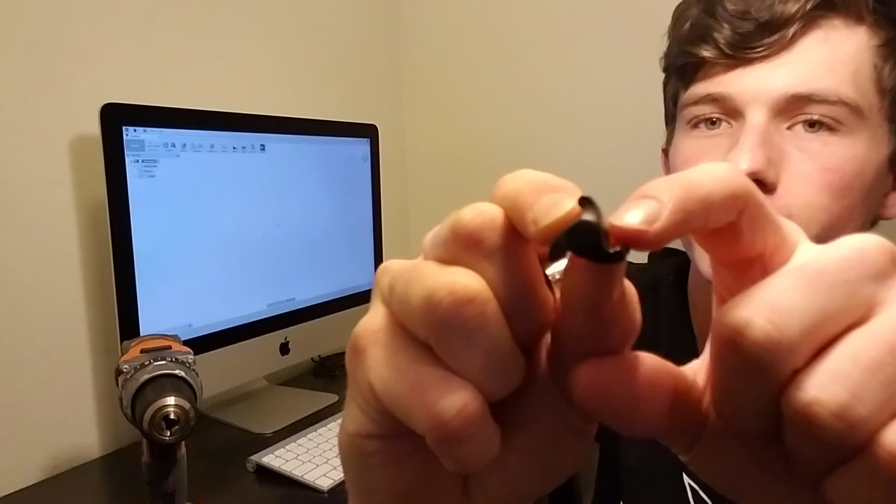But a regular socket isn't going to be a perfect fit for it. So right now my design is to 3D print a custom socket piece that will install on the drill and fit in here perfectly, because there are 3 different sides—1, 2, and 3—and you can see it curves out right there. So what I want is a nice perfect little circle that's going to fit in there. Let's get started—that'll be pretty neat. The maintenance guy Jim's going to be pretty excited about it, at least I hope so, because I didn't tell him.

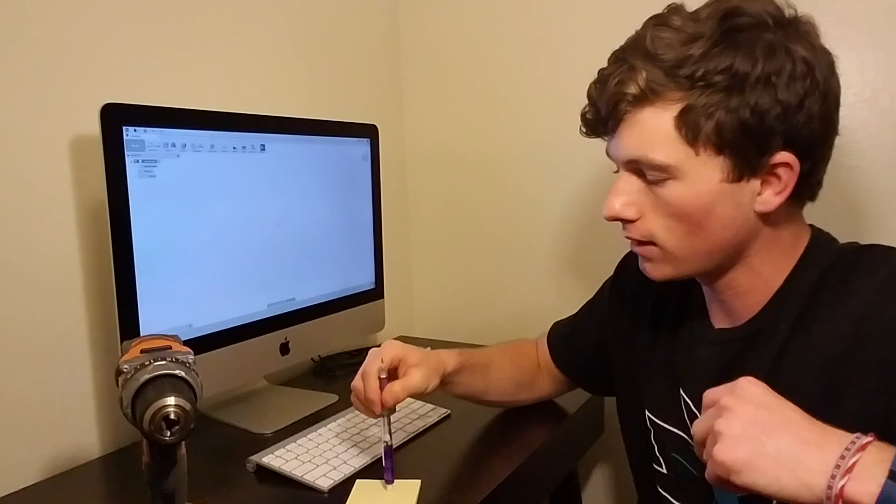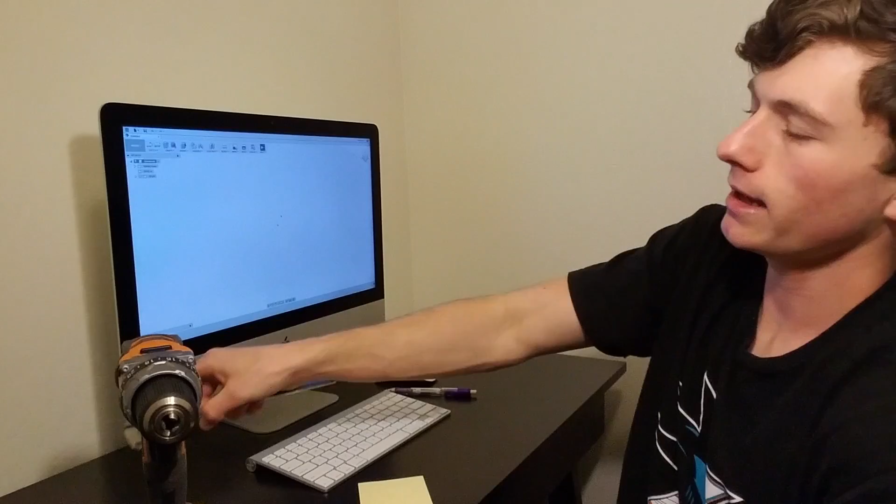Before I go on my computer, I always draw on a piece of paper to get a 2-dimensional feel of it and some dimensions. The first thing I want to measure is the circumference or diameter. It doesn't need to be super accurate, but pretty accurate. So I'm going to place it in here—doing this, I'm not going to get the circumference because it's a triangle.

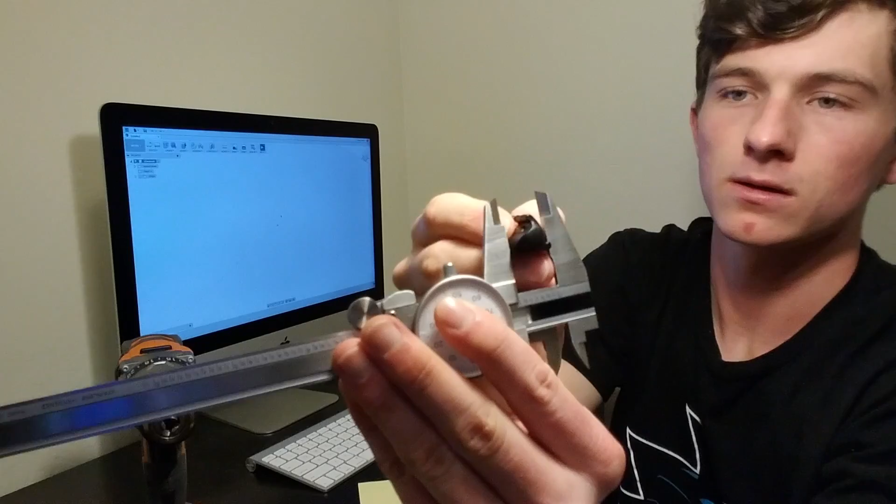So what I'm going to do is twist it in there. It doesn't need to be 100% exact, but I want it nice and loose so it fits in there. For the diameter, I'm getting 0.692 inches—sorry if you like the metric system, this is in inches, you just have to deal with that.

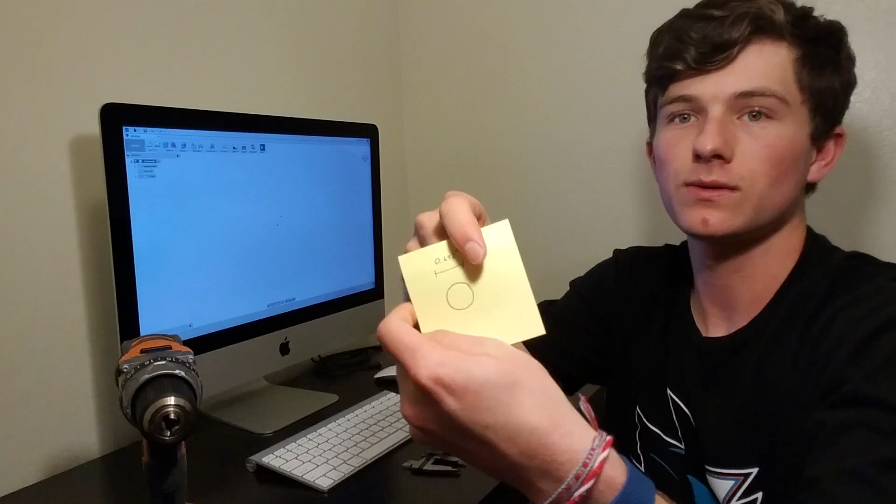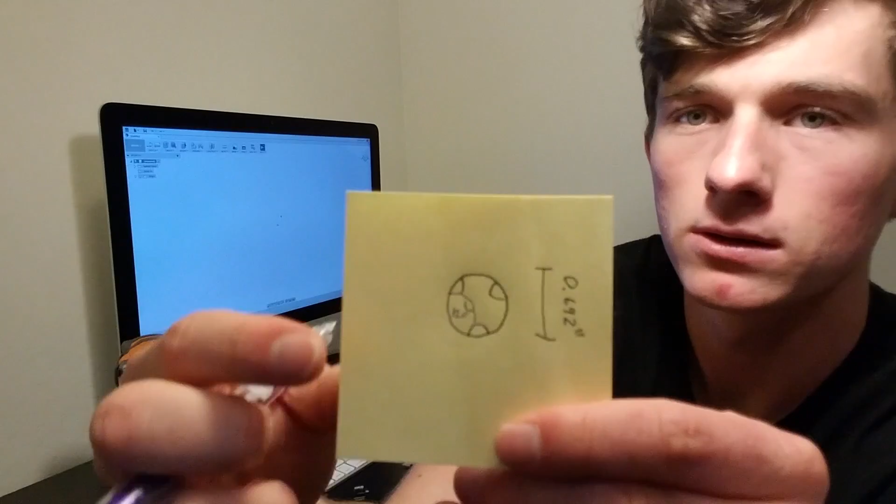Next, when I have my sphere or cylinder set in there, I need it to be locked in, so when I twist the drill and move it over, it locks in there and starts tightening down. So I'm going to install 3 tiny little cylinders that will notch into there, kind of like this, spaced 120 degrees apart—1, 2, and 3—showing it's 120 degrees apart. There's your diameter for you.

So this is where you're going to install it, slide it in there, and then I want something like this shaft on the back of it so it can install onto the drill. And since this is 3D printed, I think I want this a little bit thicker—so let's just measure this. 0.35.

So it's going to be a little bit easier to grab on there. And that side right there is 1, 2, 3, 4, 5, 6. So it's a hexagonal polygon, 0.35 inches.

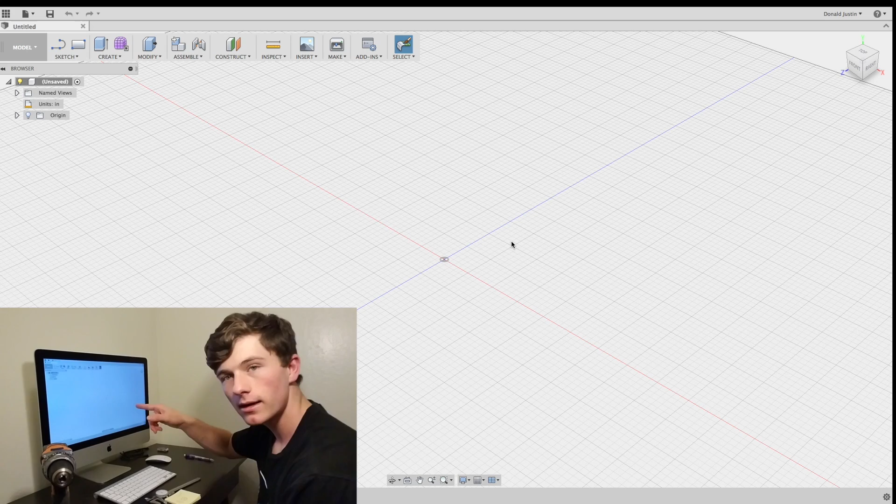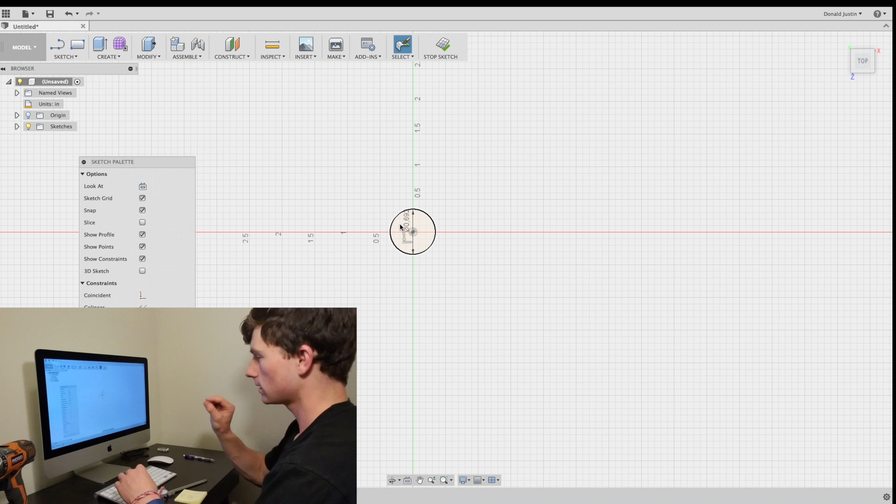Alright, let's get started. We're just going to start the sketch on one of these planes, beginning with a circle with the center point, starting in the center right here. We want that diameter to be, we already measured it out on our piece of paper, 0.692 inches. And then that's the smallest part where the inside wall is going to touch.

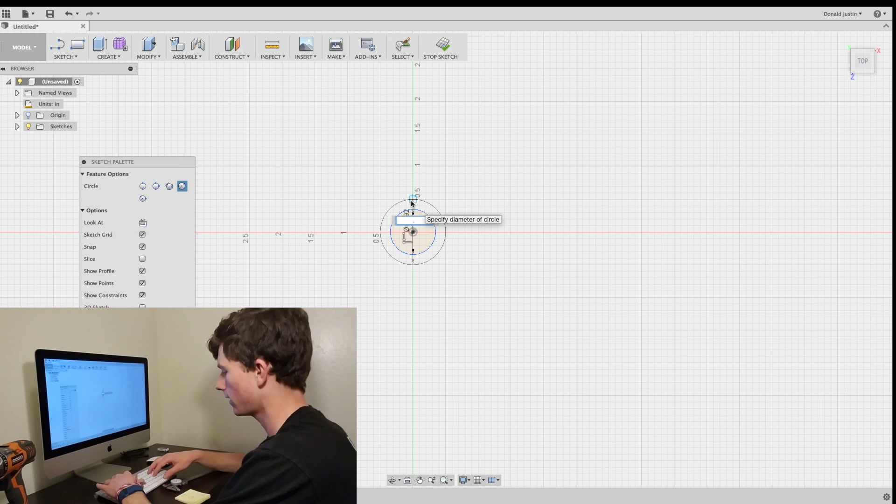But we want to build an outside wall, so I want to make the outside wall sort of thick. Remember, this is going to be 3D printed, so the wall thickness should be 0.1, looks good. So add 0.1, so 0.85. And then there's our wall thickness right there.

And then we're going to go over and just make one little circle on the edge right here. We're just going to make this an arbitrary height. At the maximum, it looks like we want it to be about 0.2. So let's dimension that. It's 0.236, so let's make it 0.19 just to be safe.

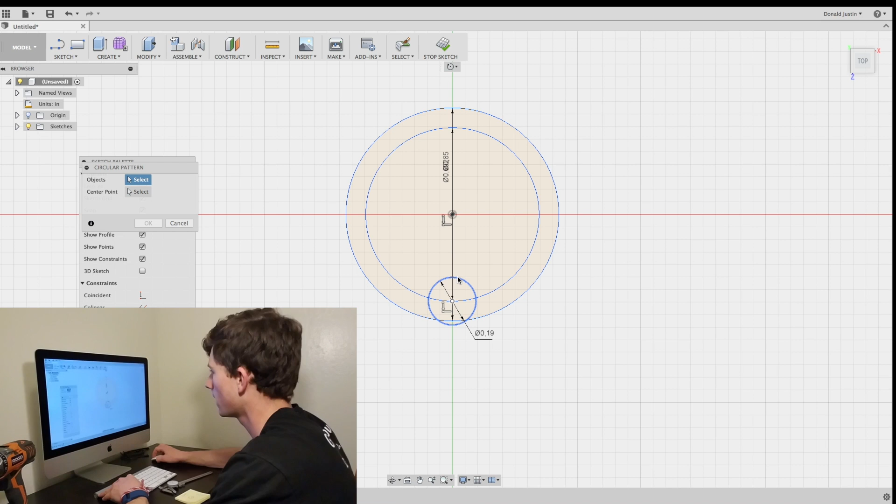And then they have this really cool thing. You go over to sketch, and you don't have to do any math. You click what you want, then click the center point for it, and you can change how many circles you want. But we only want 3 because that's exactly how our shape is here. So we're going to make it 3, click OK.

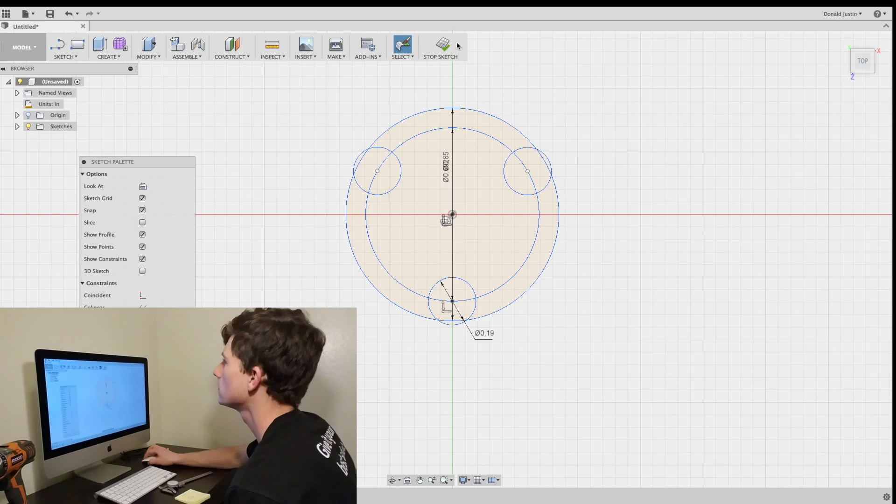And we are set. So let's stop this sketch and do an extrusion right here. Let's see what this piece kind of looks like.

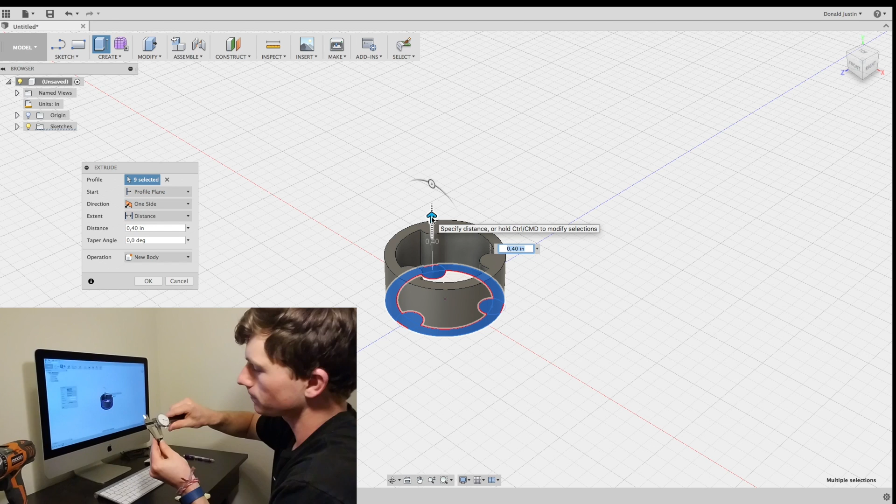And then for how tall do we want it? We kind of want to see exactly how tall that should be. We want to be able to place it in there, and if we need to pull it out, we can pull it out a little bit. So I'm thinking just leave this top part up, so that's about 0.65. And remember, these measurements don't need to be exact because I don't want this to be perfectly tight in there. You want it a little bit loose so you can place it in quick and then just zip it down with the drill and you're done.

Perfect, now we're looking pretty good. And right now, if I set that piece in there, it would just slide right through. So we need a back plate.

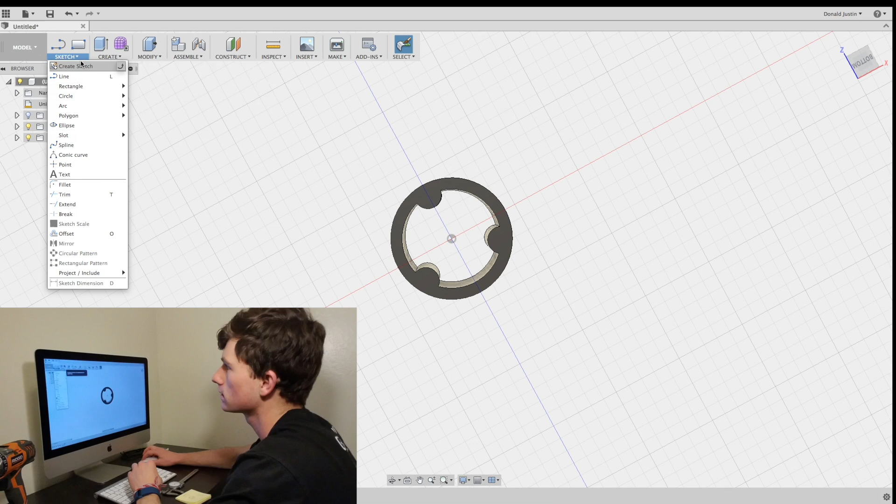So let's go back to our sketch. Over here, we're going to show that sketch, and pull it on the angles side so you can see it. And then now we have a base plate. Let's make that 0.1 for thickness.

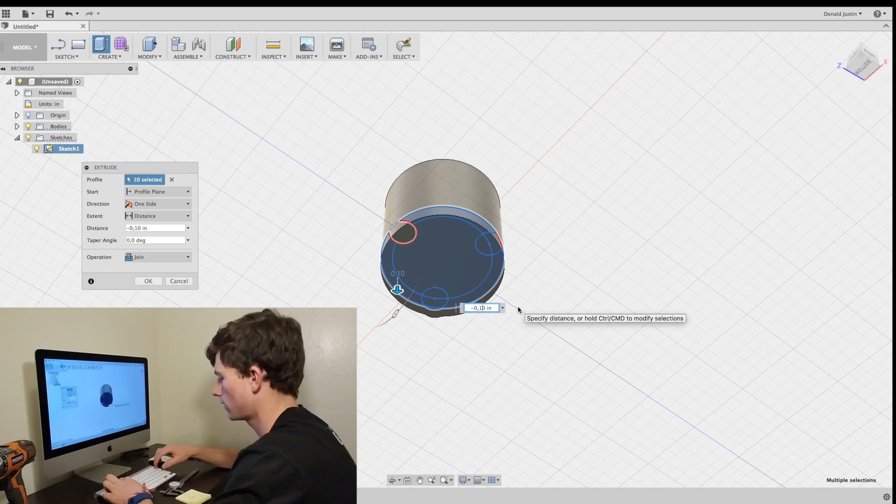So now we essentially have our socket, which is pretty neat. You're going to be able to just place it in there, and then you're set to go.

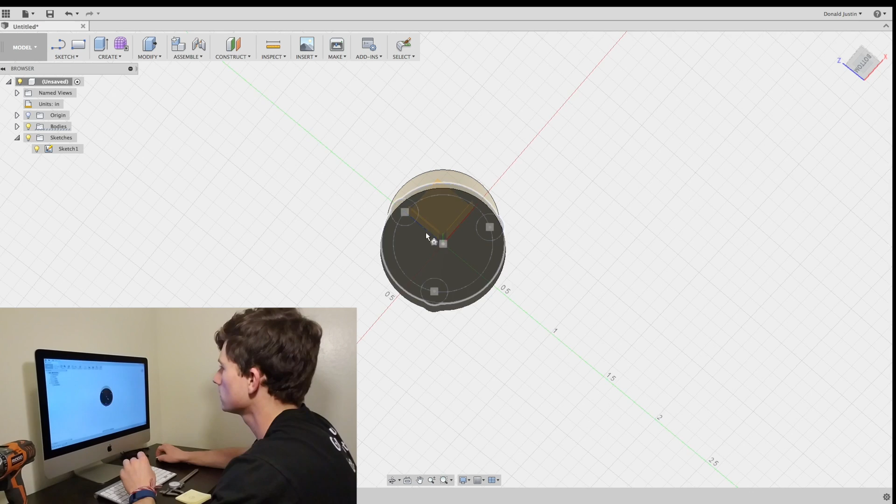But the last thing is to get the shaft so we can attach it to the drill. So go over to sketch again. They have this neat thing for polygons. Click on the plane we want to start drawing on, and we lucked out twice—this is a hexagonal polygon, so we're set.

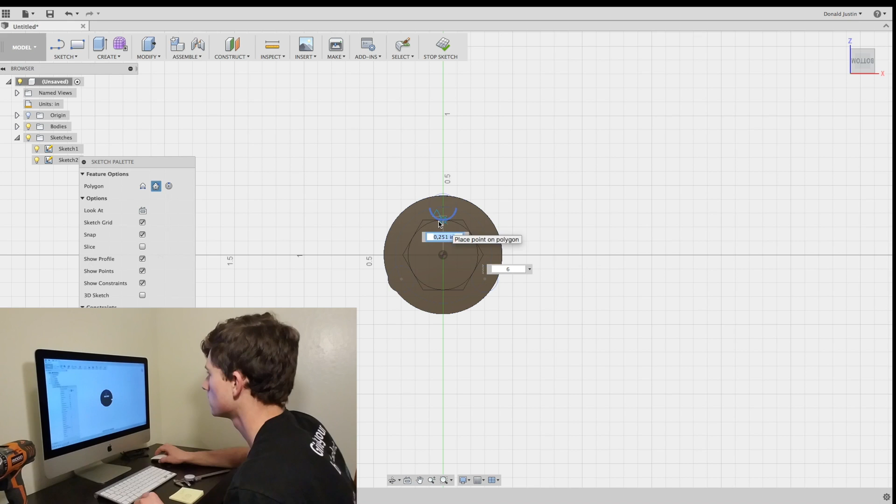And for that diameter, we decided we want to make that 0.35, but this is the radius, so about 0.17. And we are set. So let's stop that sketch.

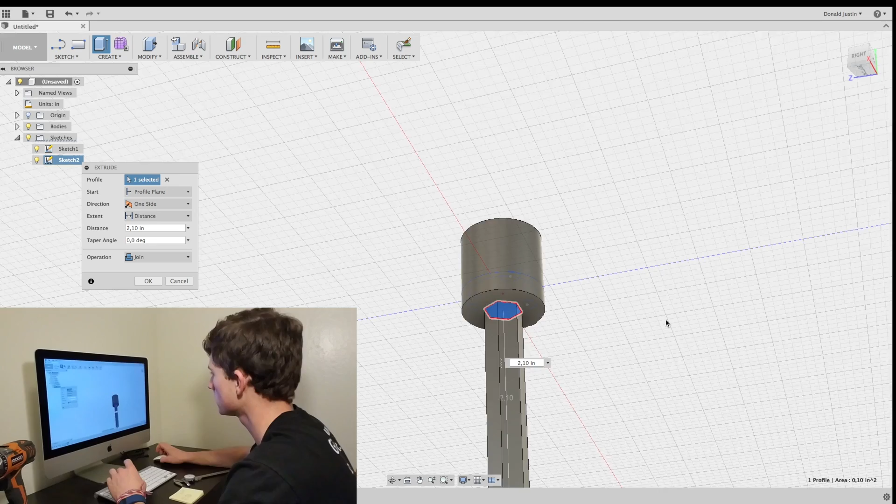We're going to modify, pull it out. And I don't want it to be too long either because, once again, it's 3D printed, so I don't want it to be too fragile. If it's too long, it might end up breaking. So the normal size for these kind of shafts is right around 1 inch. So let's make it 1 inch.

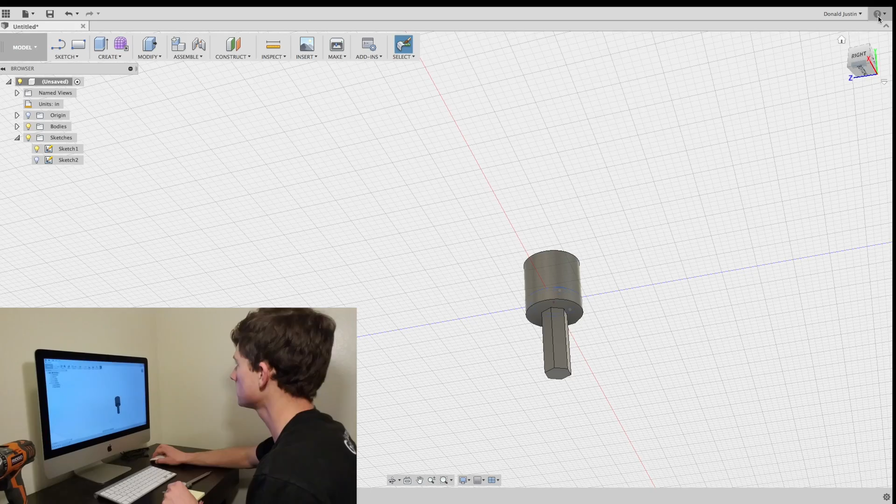And then this is basically done. We could 3D print this and try it out. But before we do that, I just like to make all these edges look really clean. So we go over here and click on modify, fillet, and I'm just going to make all these edges perfect and clean.

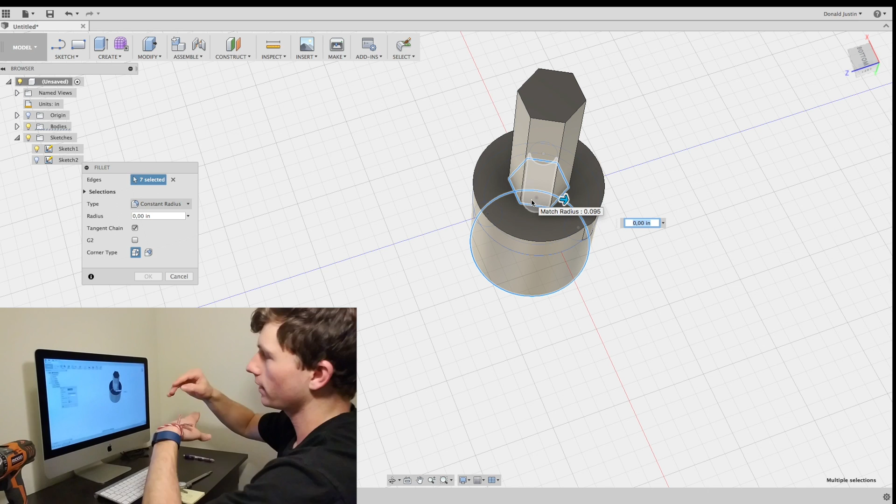One, it makes it easier for the 3D printer, and two, it's not as easy for it to break. So if there's a little fillet there, it won't just rip off as easily. That's a little too big—let's make that 0.05. Perfect.

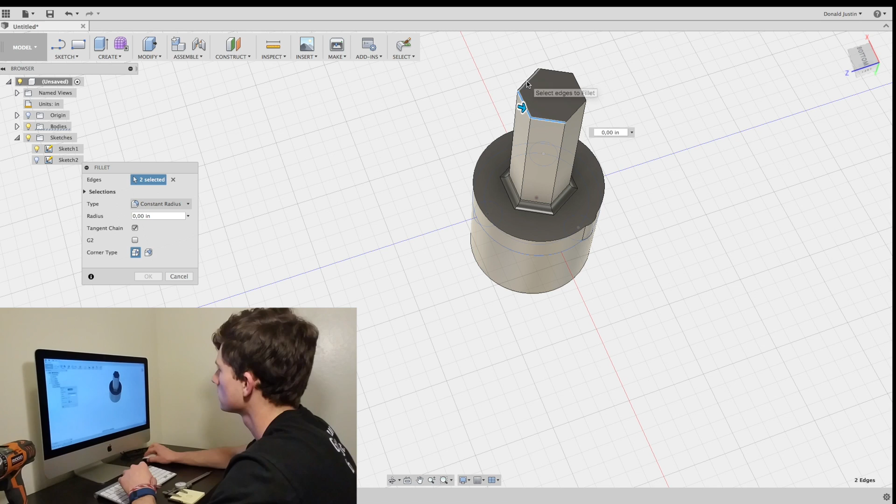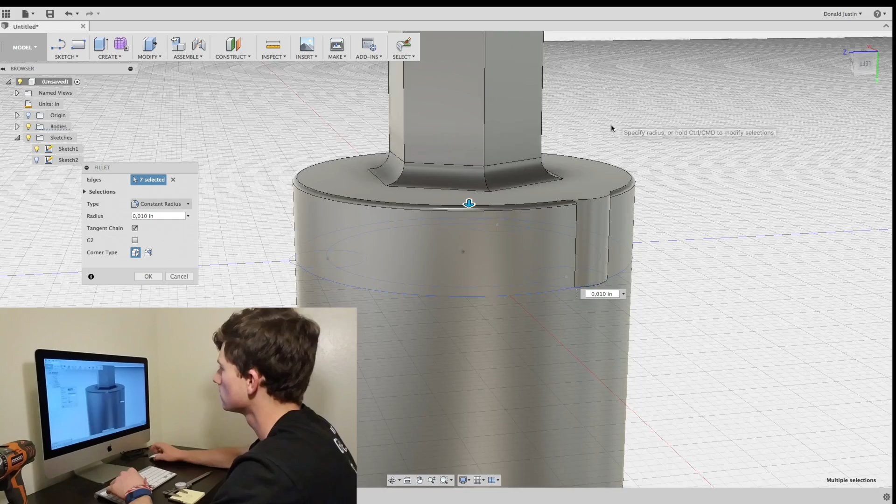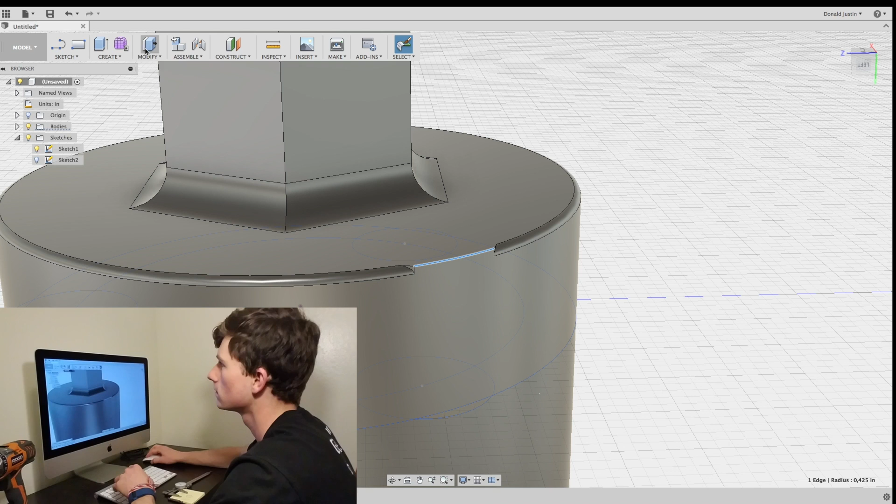And then we're also going to fillet all the other edges, the outside edges. We just want to fillet those nice and small. And it looks like one of our extrusions for our outside circle came through. I'm just going to modify that and pull that away. Cut that—that's out. Fix that edge. Fillet.

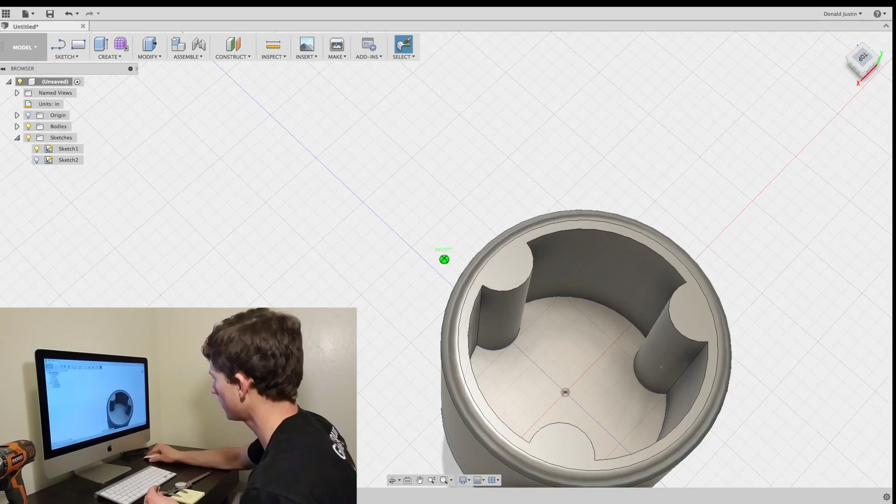And then we're looking pretty good, so we want to keep those edges pretty sharp. That's what it looks like right here, and we got it rounded over here. Everything's looking pretty good. So now all we need to do is 3D print it and try it out and see if it fits.